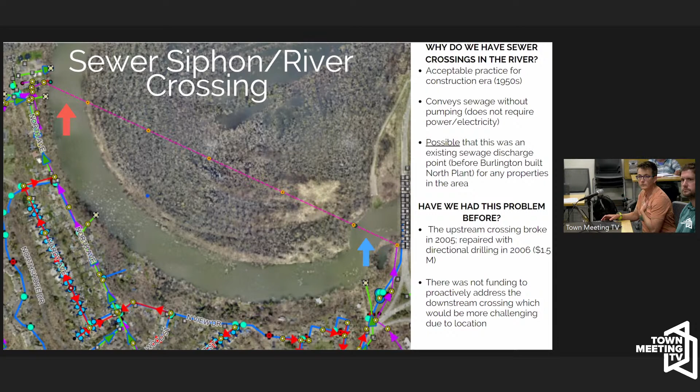But fast forwarding to the post intense rain floods, it did in fact break. This is the approximate area of the new north end that drains to that point, about half of the flow that usually goes to the north wastewater treatment plant. We weren't celebrating, but we were thinking, wow, we escaped a big one when the rains hit in central Vermont and caused all that devastation, and somehow we didn't see any impacts here.

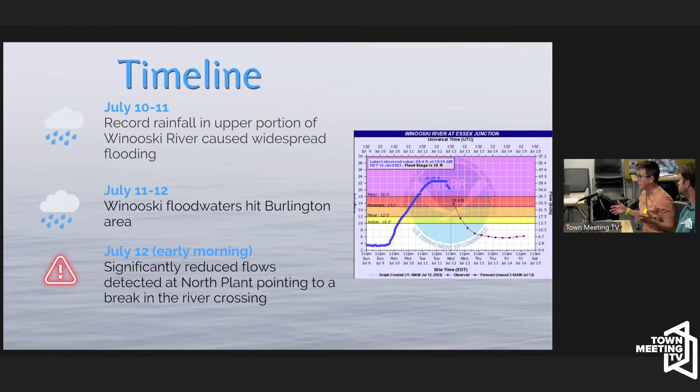Unfortunately, when the Winooski River floodwaters hit in Burlington, it was that next morning, July 12th, when I got a call from the operator saying, we got a problem, there's no flow getting to North Plant. We popped the manhole and there's no flow coming in. Fortunately or unfortunately, the wastewater operator who was there during the previous break immediately knew it was the siphon, the other siphon crossing.

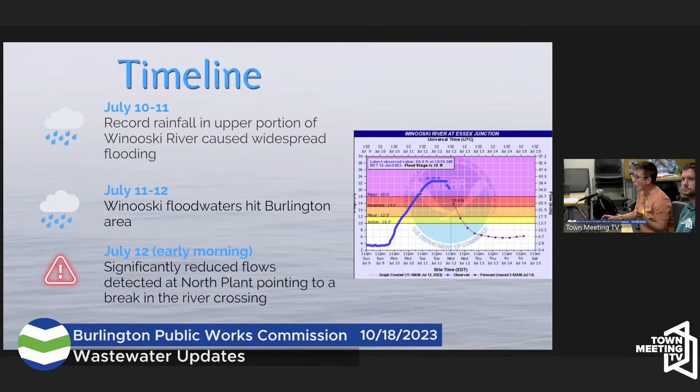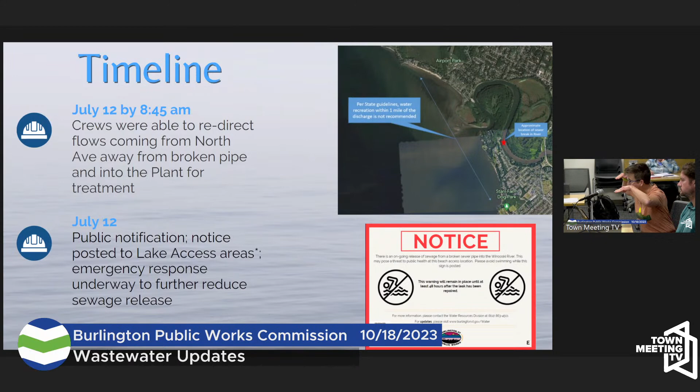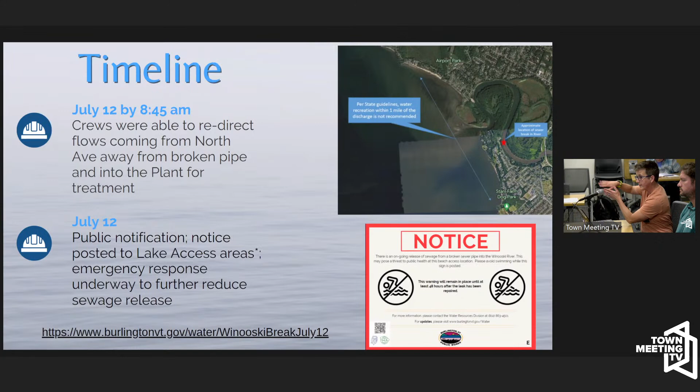So we quickly mobilized. By 8:45 that morning, we were able to redirect the flows. There's one manhole where the water from North Ave comes in, and the water from the siphon comes in, and then it goes into the plant. Because the siphon had broken, the water even from North Ave was leaking out that same break, so we were losing all of the flow from the entire new north end. Because our crews reacted quickly, they blocked off the sewer siphon part and got at least the flows from North Ave into the plant so we could treat those.

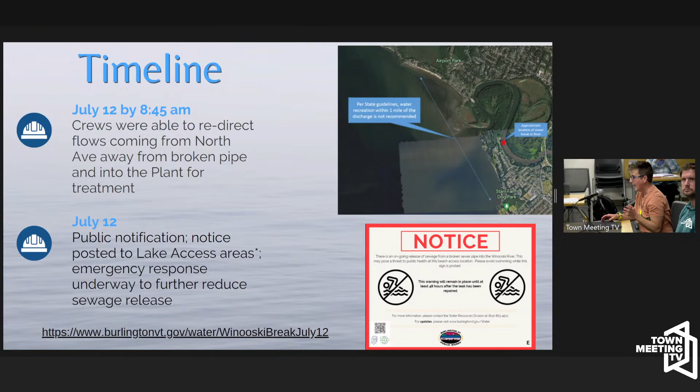Then we switched our attention to public notification, letting people know as quickly as possible that this had happened, and posting all lake access areas, including areas that aren't really public beaches but where we knew people like to frequent along the North Shore. We were managing that and then quickly shifting our efforts to a couple of different strategies.

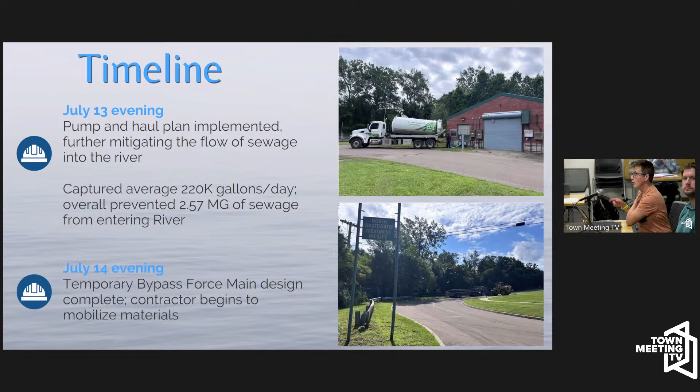The first strategy was basically 24/7 pumping and hauling, getting trucks there and sucking off as much sewage as possible to keep the entire volume from going into the lake. We weren't able to mitigate all of the stuff that was spilling in, but we were able to knock it down quickly. And then, I guess, two nights later, thanks to some amazing Iron Chef engineering...

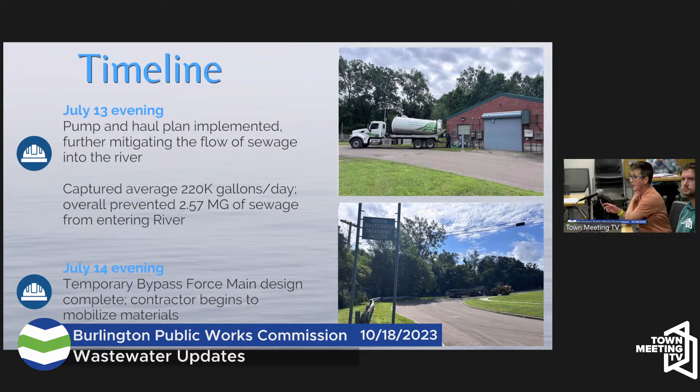Our engineer, largely Ashley Walenti, with the help of Martin and Kate, came up with an entire temporary force main and pump station design within two days. Then we were able to contact a contractor and start getting it built.

So by July 17th, and I'm just celebrating this because, no matter what happens with the rest of my career, seeing my team work this quickly to prevent additional environmental destruction was like, high five. I think I told you guys I might be prone to high-fiving and a lot of hugging in that time period, and I certainly was.

So by July 17th, we were starting to build this 5,000-foot long force main across the landscape, and by July 25th, ECI was able to put that temporary force main into operation, which was pretty darn cool. I don't think anybody here is in the New North End, but if you drive by the pipe, it's there — it makes interesting noises as the pump kicks on and off. But really a pretty cool project, a response to a terrible thing.

So by July 28th, we were able to remove the lake access alerts after we did some E. coli testing to show compliance with recreational standards. Another thing I didn't mention — when we were doing that public notification, we weren't just doing it for Burlington, we were also in communication with our partners over in Colchester, because they're very near the mouth of the Winooski. We wanted to make sure Chapin did a great job of keeping them in the loop.

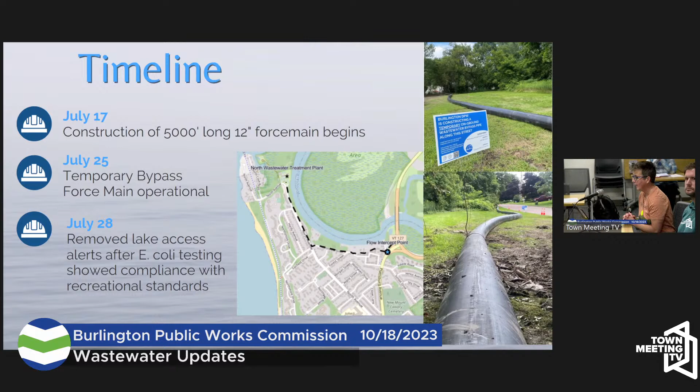When we built the pump station, we acknowledged this is a temporary situation. It's not perfect, and it's not as robust as a permanent pump station like we have in other parts of the city. We want to acknowledge there have been a variety of issues.

It's worked very well, but during large storm events, and occasionally due to a few mechanical issues, such as a day when the discharge hose cracked and spewed things into the air, in every case, because of the alarming, we were able to get on it and act quickly. But we have had a couple of additional releases over the course of this event. Overall, if we didn't have this in place, we would have been dumping on the order of 350,000 gallons of sewage into the river every single day without the quick action of the team and the contractor.

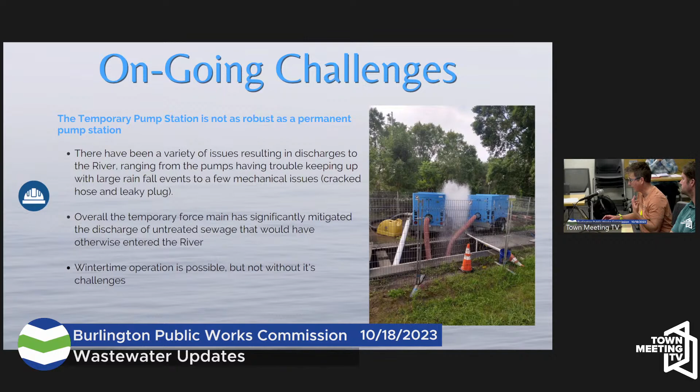All along, once we put this in place, we designed it so that if we had to go through the wintertime, we could, but none of us wanted to, largely because of the amount of effort it takes to babysit it and make sure all the things that could go wrong with it don't go wrong. So we quickly were shifting to how we could get something in place for this winter, and also the long term.

A couple of other things we did: in the early days, we had done some dye testing, which helped show the location of the break. You can see the green dye - we put this very fluorescent dye into the pipe and then used drones to make sure we could see it. We also dye tested from the other side, to make sure that first crossing was okay, and to give us an idea of whether this was a small localized break or whether we lost the whole pipe, because that would have been a whole different emergency repair scenario. Fortunately, the times we dye tested it, it came up in the exact same location, pretty close to the shore. It took us a long while because of all the summer rains and the high turbidity.

The Winooski was running chocolate brown for a really long time, and we finally were able to get divers in. We had them at the ready almost 2 weeks after the event happened, but they just couldn't get in and see anything. Even when they got into the water on August 17th, they were largely going by feel. They couldn't see a ton, but based on what they felt and recounted - I think this is Steve Roy's drawing - we were able to sketch out what we thought we were up against, which was largely just one separation, but with some scouring that was leaving that pipe unsupported along the riverbank.

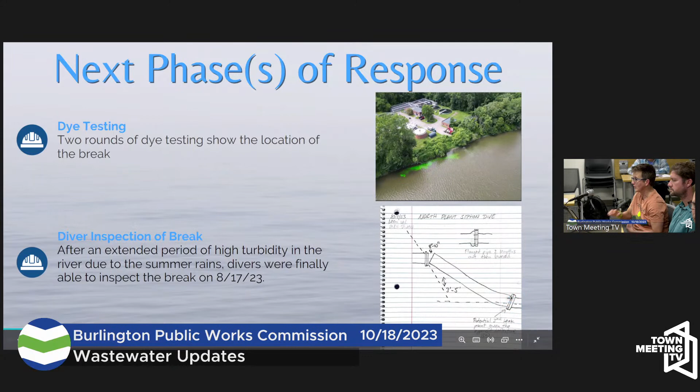This is a recent picture with the divers having gone in and really visualized that gap. The scope of work includes not only fixing that gap, but replacing a couple sticks of pipe - they're going to go about 70 feet beyond that to replace, and then do additional dye testing once it's done to confirm that it's sealed up, to make sure those joints are secure, since the pipes are joined together and it's not just one long section. So they're going to do their due diligence while they're in there.

Once this fix is in place, our plan is to decommission the pump station, those temporary pumps that are over on Plattsburg Ave.

Our plan is to leave that 5,000-foot long force main in place, so that if something were to happen to our repair—and we believe this repair should be robust—we would be able to quickly mobilize and not have to go through the whole process again and spend all that money. But we would be looking to decommission that pipe as soon as we can. That factors into this longer term repair.

So in parallel with releasing the RFP on the design build, our team was releasing requests for qualifications for design teams who could help us evaluate alternatives to not having a pipe on the bottom of the river. That might look like directionally drilling multiple pipes so we have resiliency under that section. But it may also involve creating a permanent pump station with a permanent buried force main, which might be the safest overall—just get it out of the river entirely. We don't know. We're going to have this design team help us crunch those numbers and figure that out.

And the cool part—well, two cool parts. It's not cool that Vermont reached this threshold, but because Vermont had so much damage, we went from the 75-25% cost share of FEMA to 90-10%, which I definitely gave a little yip in my car when I heard that. And then the state, because of our disaster planning efforts at the city, will cover half of that 10% local match. So we're still going to be out some money, but a lot less than we would have been.

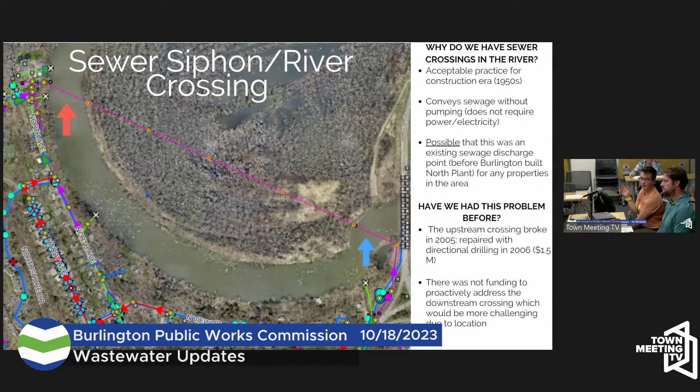I think, just for being honest, the next big challenge, perhaps not in this iteration because it can't be addressed, is that North Plant is not an ideal location on the bend of a river, kind of in the cutoff chute if you look at the river on a bigger level. In fact it's the one piece of city infrastructure that does not have insurance because of its location. So just sharing the risks we uncover every day of how things were built, and trying to figure out how to do our best with some of the things we're going to be talking about. Certainly, the design for the next upgrade will keep that in mind to try to make it as resilient as possible given its location. But next generation, wherever you are, they're gonna have to figure out how to deal with the location in a bigger way. Sorry, we had a lot of rah-rah, but we gotta bring it back to reality.

Has insurance, no. Flood insurance, no flood insurance, sorry, just to be clear. For the record, it has insurance. Great, thank you for those responses.

All right, and now onto the tertiary treatment pilot. Yes, tertiary treatment. So why, given all the things we have to do, would we even be looking at new things at the wastewater treatment plant? The reason really is the health of our lake.

There's a lot of things that factor into cyanobacteria blooms. Some of them we can control and some we can't, or not imminently. One thing we can't really control right now is the calm, warm water conditions we saw this summer, which kicked up cyanobacteria much earlier. The piece humans can control more easily and quickly is how much nutrients we're putting into the lake. Because of that, the state in 2016 passed a total maximum daily load, which looked at all the different ways humans needed to limit the discharge of phosphorus, one of the primary nutrients in the lake that drives cyanobacteria from the landscape.

And for those of you who have attended previous presentations, we looked at all the different ways in which we thought Burlington could manage its phosphorus obligation.

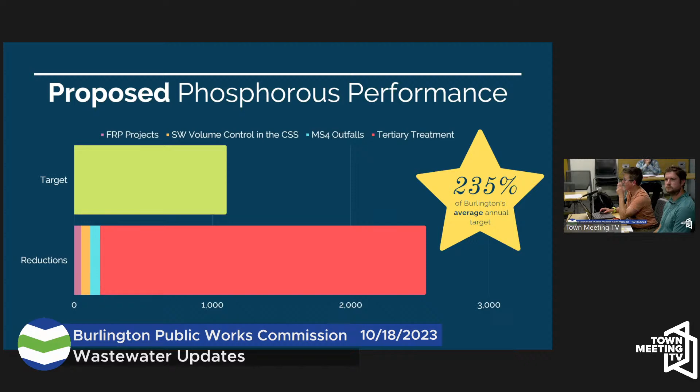So when wastewater treatment plants are looking at new technologies, it's customary to do a pilot. You don't design it on your desk and then hope it's going to work. You actually need to subject the different technologies you're interested in to the actual conditions. The goal of the tertiary pilot was to evaluate the ability of selected technologies to meet 0.1 milligrams of phosphorus.

The average performance of main plant is usually able to get the phosphorus level down to about 0.28 milligrams per liter. We've had it evaluated, and engineers say the plant is performing exceedingly well, largely due to the creative ingenuity of our plant operators who are dialed in and constantly watching how things are varying. But we can't get it any lower than that, even with additional chemical optimization—it's basically doing as well as it can.

So in order to get down to this 0.1, which was modeled in the integrated plan, we need additional technologies. We needed to evaluate this under a variety of conditions, what we call steady state, which is just when everything's normal, a typical day, nothing crazy.

Hydraulic stress, which is when the plant receives a lot of excess flow from wet weather, from a storm event—our plant flows ramp up from like 3.5, 4 MGD up to as much as 13 MGD very quickly, and that can present a stress for any type of treatment technology.

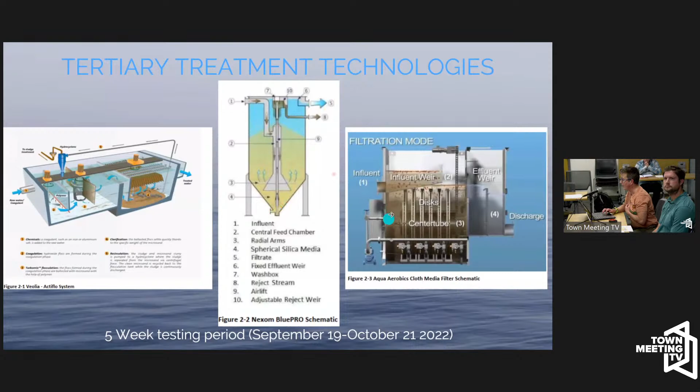These are all the fancy schematics: this is the Actiflo system, the Nexom BluePRO, and then the Aqua Aerobics cloth media filter schematic.

At the end of the day, all 3 technologies met the goal of 0.1, so there was no one technology that was a super dud. But when we looked at Aqua Aerobics, it performed the best overall during the steady state.

So Aqua Aerobics is this green line, this red line is the goal, and the purplish blue is the influent TP, the phosphorus that's coming in before it goes through tertiary treatment.

You can see that the orange, Nexom, and the regular blue, Veolia, kind of hugged and were able on average to stick around that 0.1 during steady state, except for the first day when they were dialing things in. The cloth media filters really were able to perform super well throughout that entire period.

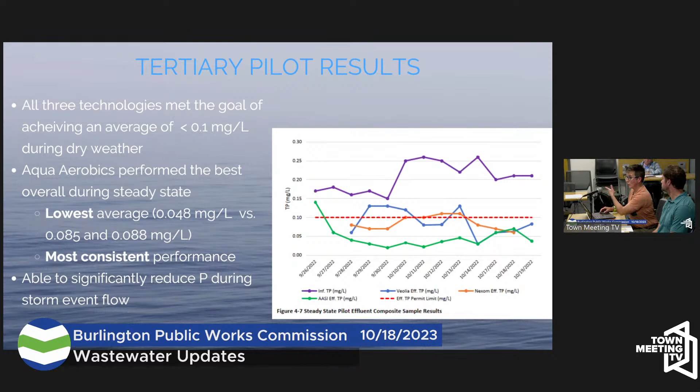It also didn't do as well—I can't remember if it was the Actiflo—it didn't do as well during the storm event, but it still did well. It still was able to knock down the phosphorus that we usually would see going out into the lake during a storm event, down lower, I think to 0.38 or something like that.

This is their performance over all of the different states: steady state, the hydraulic stress, and then back to steady state with that one peak being the vortex blend. This isn't a comparison, this is just the Aqua Aerobics, but you can see it was able to stay below that 0.1 target the entire time, with the exception of that one storm event. But even during the storm event, it's knocking it down quite substantially, so it is able to do good things during a storm event.

Any questions about all the graphs? I love graphs. What was that hydraulic stress period—was that heavy rain during those few days?

So the hydraulic stress period is an artificial hydraulic stress situation that they create. They're only pumping a certain amount, if I recall, to the tertiary treatment, and so they artificially pumped more than would usually go there under normal conditions. So that's artificially generated.

The vortex one was them actually grabbing flow from the vortex and blending it, then putting it through the system so that it was seeing that potentially dirtier water. Because the vortex—the big swirl separator—handles water that's not going through the full primary, biological, and secondary process, so during certain portions of the storm it can have more phosphorus than treated wastewater would, though certainly not more than regular untreated wastewater.

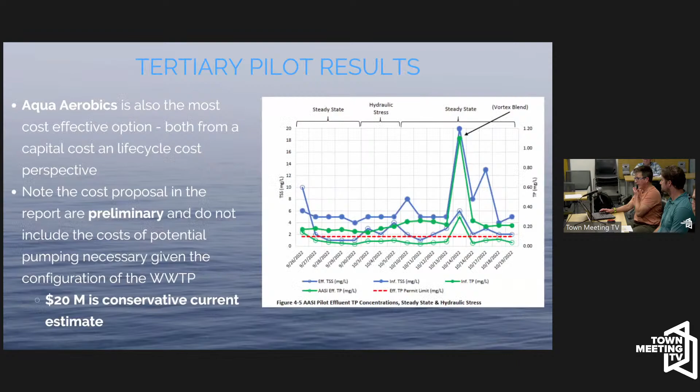I would be remiss, I've frequently committed, Burlington is gonna do its part, we're gonna meet our phosphorus obligation through the TMDL. The challenge is the lake is a mixed system, so continuously remind people to support statewide efforts for phosphorus reduction, because we can do everything that we're gonna do, and there's still gonna be phosphorus coming down the Winooski River, and so sadly, we may very likely continue to see cyanobacteria blooms.

So we're having conversations with Burlington Parks and Recreation, Waterfront, about resiliency measures, about how we provide places for people to cool off even if they can't access the lake. One of the challenges with the flood, I had heard that the entirety of what came down the Winooski River in 2022 as far as phosphorus came down in that one flood event. So climate change is a thing that we collectively as a state and a region have to really try to figure out how we're gonna change.

Again, sorry to have sadness, but so much nerdery and happiness, but.

Okay, well, let's see if we have any questions so we can end on a high note now. Commissioner Fox, any questions on the presentation? Yeah, I had one, I apologize. It was a lot to get through, but let's see what page of the packet that I'm on. Oh, the report itself? Okay.

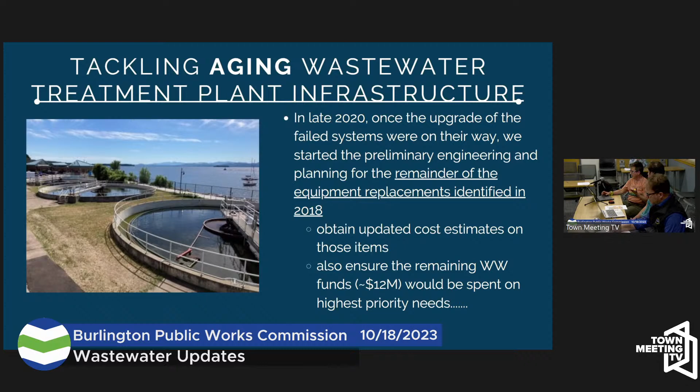I've shared this with you all before, but what we found when we started looking at it from a risk perspective is that while we were doing some improvements after the 2021 upgrades and getting rid of some of the failed systems, as you looked out across time, even after we thought we could spend the $12 million, there were still a ton of systems that were in the C, D, and F category - and this is also an eye test, apparently. For those of you who can't see that, those are letter grades A, B, C, D, and F, using a fairly rudimentary risk system. Overall, the number of systems and the replacement costs of the remaining high-risk systems we found were significantly higher, significantly greater than the remaining money that we had.

And we also started to see, as we tried to move all the pieces, that anything less than a truly comprehensive equipment and process renewal was going to keep Burlington at risk of wastewater treatment failures and what I consider preventable beach closures. Some beach closures are harder to prevent because of climate change, but the ones that directly result from our failed infrastructure, I view as preventable.

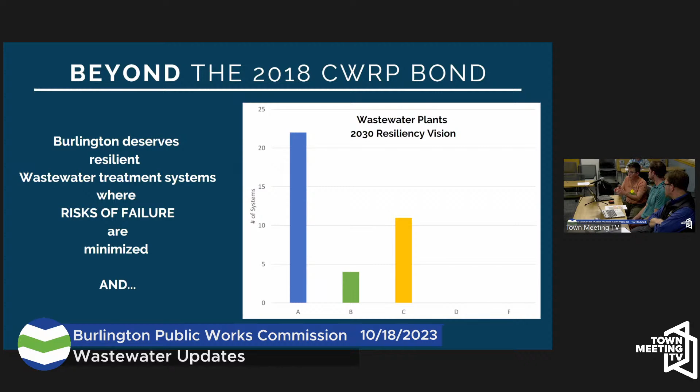I made my pitch to you all last time that Burlingtonians deserve resilient treatment systems where risks of failures are minimized. So at its core, we need to make sure that the stuff we have right now works, because we're starting to have trouble with that.

Separately, when we think about a more modern wastewater treatment system, we want to focus on actually improving and modernizing those systems, not backsliding, but doing things like tertiary treatment to create even better water quality for what's going out the pipe. We're making sure our systems are as resilient as possible against flooding and other natural disasters, and looking at how we increase the capacity of Main to accept a potential East Plant consolidation, as well as other growth opportunities in the city.

We have a number of safety issues, and we want to make sure this upgrade makes conditions a lot safer for our employees, particularly around ventilation, since they're exposed to a lot of different gases from sewer systems. The last piece, which I think everybody will vote yes for, is we may not be able to get rid of all the odors, but through work targeted on the primary systems - the initial tanks, which have some of the stinkiest water - we're hopeful to reduce off-site odors at Main Wastewater Treatment Plant, which we hope will benefit bike path users.

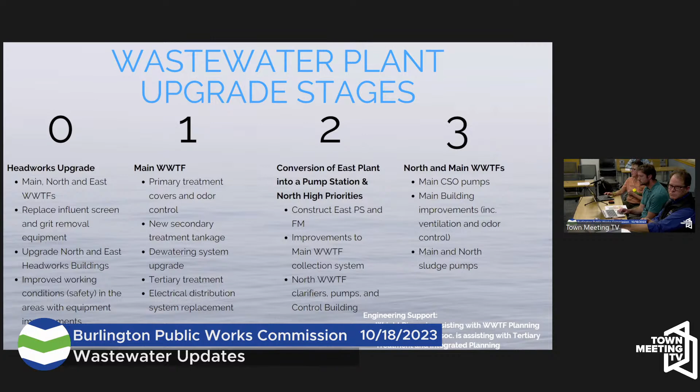This is what I alluded to before. I'm going to hand it over to Martin. Stage 0 is largely us drawing down the remaining money that we have. As we move to Stage 1, there's a specific focus there, and that's where tertiary treatment would be. Stage 2 has a different area of focus, and Stage 3 is further out. We want to make sure we have this big plan for how we're going to progress over the coming years. With that, I'll hand it to Martin.

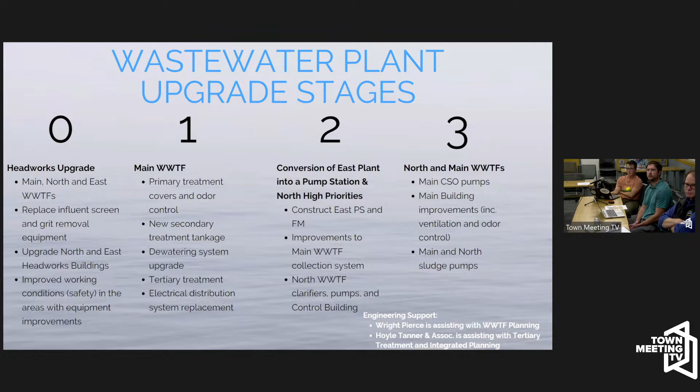As we move into discussion of Stage 0, I wanted to talk about schedule and cost a little bit. This is the headworks upgrade, which includes screening and grit primarily at all three wastewater plants. Design is underway, so from 2023 to 2024 we'll be in design, with construction planned to start in 2024 through 2026. The cost estimate is approximately $12.8 million, which is part of the 2018 bond.

As Martin goes through, we are presenting our cost estimates - they are conservative. We're constantly refining them, and early in the preliminary stages you often see cost estimates with higher contingencies, but they are what they are.

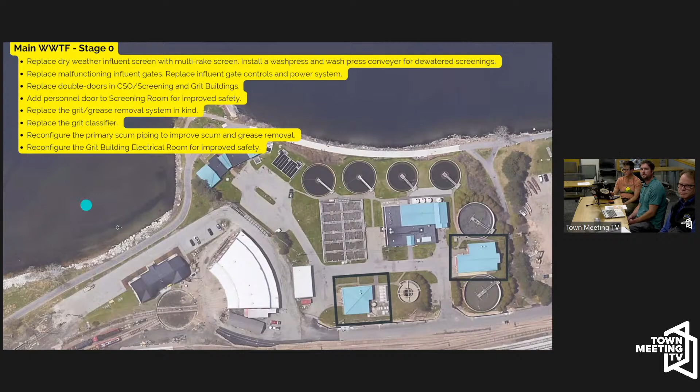So this is Stage 0 in final design. Megan is highlighting the bottom, which is the screenings building, where the wastewater first enters - that's where we'll be replacing the dry weather influent screen with a rake system and a wash press. It's basically a replacement of what's there with modern equipment, as well as influent gates and the controls for those gates - pretty substantial pieces of equipment that just need to be replaced because they're constantly failing. I have some photos of those.

We have some building improvements here that are necessary from a code perspective, as well as the new equipment we're putting in. On the right-hand side of the screen, that's the grit building - we'll be replacing the grit and grease removal system and updating components of that system. Again, it's largely a replacement in kind, but with modern equipment meeting modern design standards, because these systems are at the beginning of the plant process, so they really do experience the highest wear and tear - bricks, rocks, whatever anybody puts down the toilet or in the catch basin, so they get hit hard.

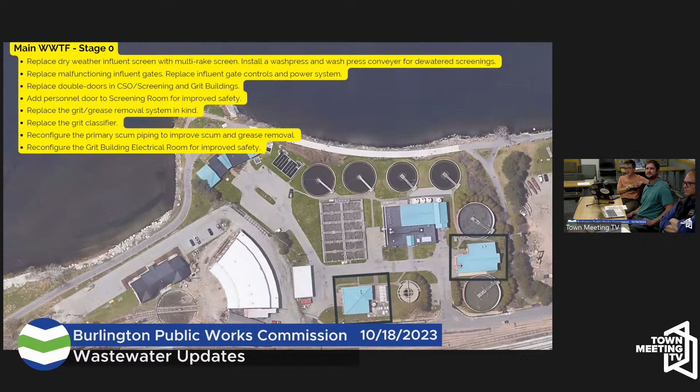Probably go to the next slide.

Same thing is happening with the proposed final design for Stage 0 work at the North and East wastewater treatment facilities. The east plant is the aerial image on the left, and the highlight is around the grit and screening building. The building itself, with the green roof, is where the current screen is that needs to be replaced.

On the exterior, right on the right-hand side, is the grit and grease removal system. As part of this, we'll also be modernizing the building so that it's more energy efficient and has up-to-date HVAC ventilation.

And that system, even though we're going to consolidate or turn East Plant into a pump station, is something you would need to have there anyway, so it's not like we're spending money and then undoing it later. We picked items that were high priority and that under all circumstances we perceive need to happen. We're not wasting money on things that in five years we may not need anymore. We're going to need these for a long time.

And the same applies for North Plant, down at the end of North Ave. Basically it's the same design, constructed at around the same time.

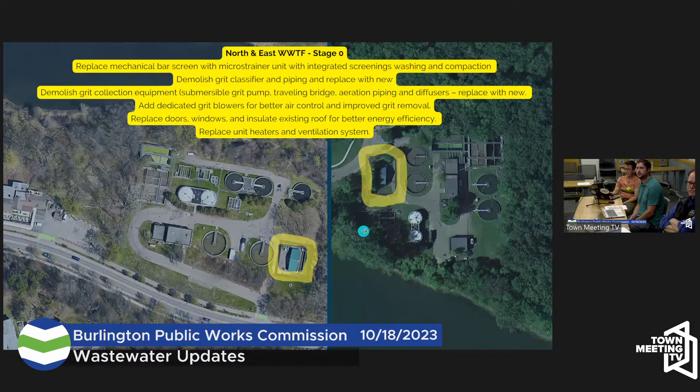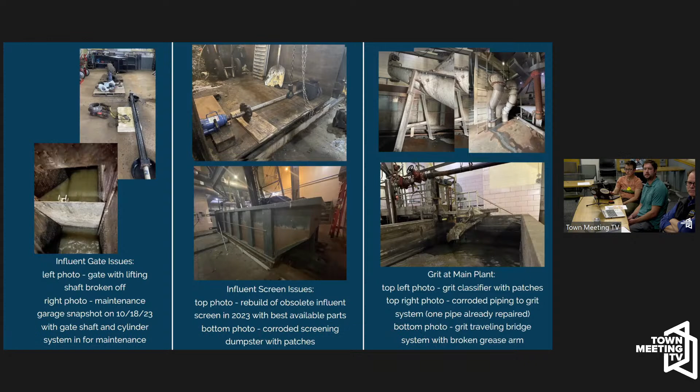Next slide, these are some photos that, thanks to operations staff, I collected. Some of them even from today, because I was curious what's in the maintenance garage, and it happened to be one of the cylinders and shafts for a gate.

On the upper part, that's something that will be replaced. Multiple components of our gate systems are failing and are going to be replaced for Stage 0 work in the screenings building. On the bottom is the channel where the screens are, which is supposed to have the shaft connected - it just happened to snap off after that specific failure.

And the thing is, if these don't work, stuff gets through and will just destroy the rest of the plant. So it's not really something we can leave.

And then in the middle here, this is in the screening building as well. I think it was early 2023, or end of 2022, one of our mechanics completely rebuilt our influent screen that we're going to be replacing. But they had to use custom parts because the equipment is completely obsolete - the manufacturer doesn't supply the stuff that we need. Thanks to having such a great operations team, we were able to do that.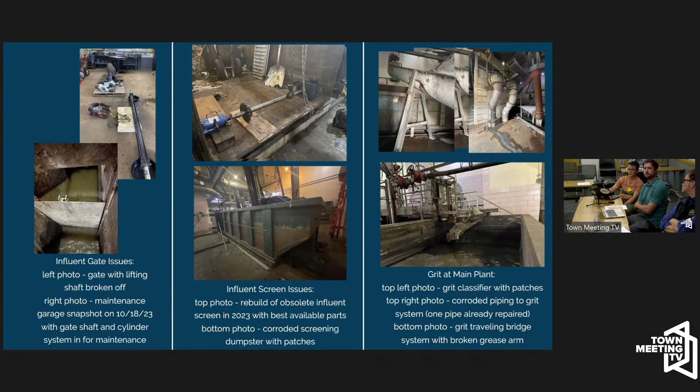And the bottom photo is the grease arm on our grit collection system broken, so that's before they repaired it. Our guys are always working and maintaining the facilities, and I wanted to show that.

It'll relieve a lot of headaches that are only going to get worse if we don't fix this. And also, the person who primarily fixed all of these things is probably retiring in the next year. Just from a workforce standpoint, finding folks with some of the skills that we currently have has been hard as well, so that's also a risk in the back of our head.

So Stage One work - we're in the preliminary engineering phase right now, from 2023 to 2024. Design will start in 2024 through 2025, and then construction starting in 2025. This is a big ticket cost item because it's not just replacing in kind - it includes significant improvements at the main wastewater plant, including tertiary treatment and new tankage. So I'll move to the next slide and jump into that.

Thank you, sorry we're going too slow. Yeah, no, I know, it's my age. Dollar signs, dollar signs, dollar signs.

Yes, 121 million estimate was what's on there for Stage One. And it's a significant update to the main plant.

This is in preparation. We can't bring East Plant to Main Plant without upgrading here first, and upgrades here are also necessary for aging infrastructure. I can get more into the justification of the East Plant pump station when we get to that slide later, but I just wanted to set up that this upgrade is to accommodate the East Plant flows coming here.

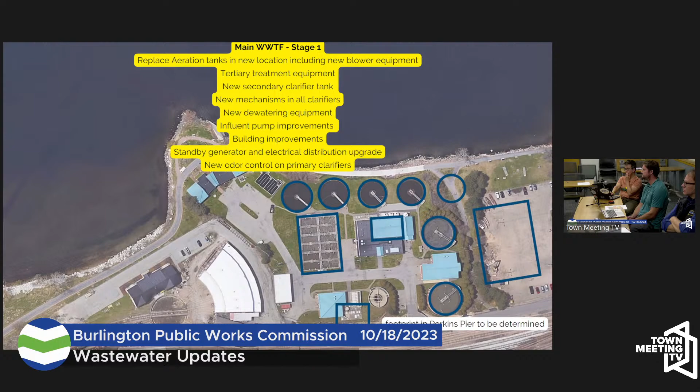I don't mean to be dense here, but basically if you're saying East Plant has a capacity of, say, 5, and Main Plant has a capacity of 5, by combining them you have a state permit capacity of 10, without having to ask for more for Main Plant. Is that my understanding? Correct, yes.

Sorry, yes, yeah. So okay, it's closer to like 5 and 2, and like 1.8... 1.2, is it 1.2? But whatever it is, you're adding the two of them, and that whole piece for Main Plant then is still under the same permit.

Right, okay. East Plant gets, I think, approximately half of its permit, so that means we get that additional capacity at Main Plant, which is then projected to meet future growth for the next 20 years at Main Plant. Okay, much bigger sewer shed. Thank you.

Also, and we'll probably get into it or touch upon it again, but this enables us to consolidate resources, and when we look out long-term, it ends up saving ratepayers money to not have three separate plants. It's sort of weird to have a small town with three separate wastewater plants, and a lot of engineers, when they come here, say they just put plants where the discharges were already happening, so we'll talk about that more, but there are lots of reasons.

That was already one of my questions, like why are we doing this? Yeah, that's great. Is there anything else?

So the first three items, the new aeration tanks, tertiary treatment, and secondary clarifier tanks, those are all new added capacity, and then I'll get into the other items.

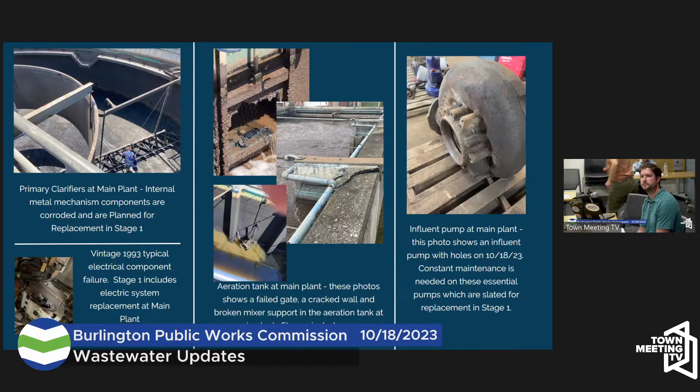You can see here that one of the gate slides in the upper left-hand corner is completely rotted out. There's a big structural crack in that tank right there, which makes me nervous when I drive by — yeah, those are the biggest ones. The lower left also shows a structural arm support that broke off of a mixer in the aeration tank. And then our influent pumps are how we get the wastewater through the treatment plant, and those need constant maintenance. This one was in the shop today, so I took a photo — it has some holes through the body of it, so just wanted to share that.

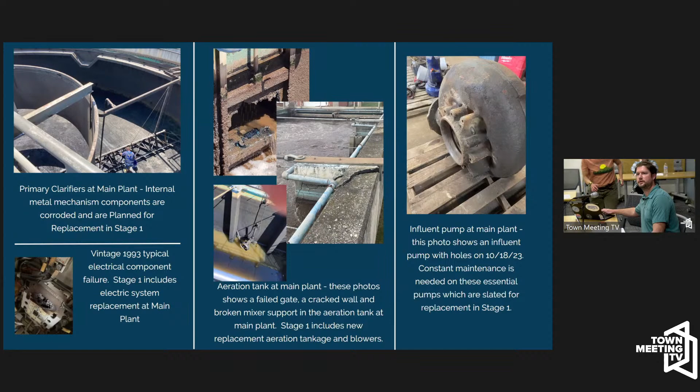What did you have, another?

So, this is stage 2. Now that stage 1 is done, we'd be able to accommodate the flows from the east plant. This is the pump station conversion, as well as important north wastewater treatment facility improvements. This is also in the preliminary engineering phase from 2023 to 2024. Design would be a little bit after stage 1, with 2025 to 2026 as the target. Construction in 2026 to 2028, with the current cost estimate at $38 million.

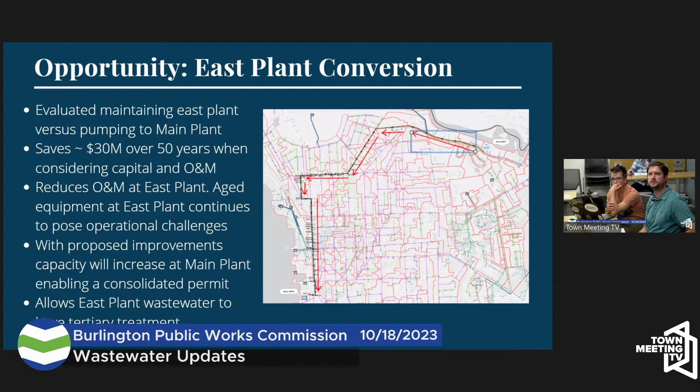So we did talk a little bit about this, so I'll go through the pieces we haven't covered yet for the east plant conversion. As you know, east plant is on Riverside Ave in the upper right-hand corner of that map, and those arrows show the approximate route that new piping would be needed to get the flow all the way to main plant. This was evaluated, comparing keeping east plant and maintaining it as-is versus pumping it to main plant. If we keep it as it is, we'll have to upgrade it because it's so dang old.

And so with that, when you look at it over 50 years, there's a $30 million cost savings when capital and O&M are considered. So they're significant cost savings, which we will have to refine more as we move through engineering to confirm that these assumptions are correct.

It also gets rid of a pretty bad operational challenge right now, because there is so much old equipment at the east plant. So if we did keep it, we would have to do a major overhaul there, which is all considered in the evaluation.

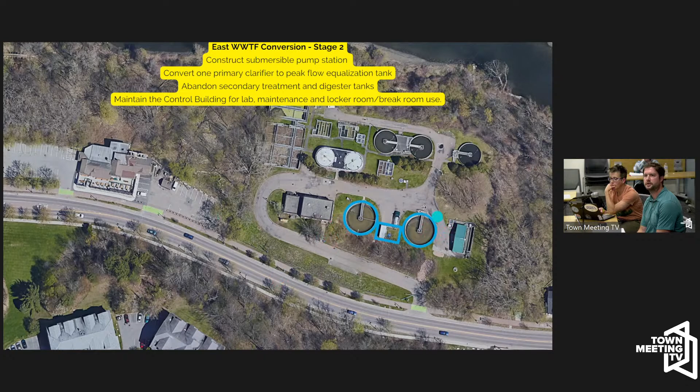So the stage 2 east plant conversion: it would be a pump station, that middle square is where we're assuming the pump station would be, and then the capacity of one of those tanks, the primary clarifier tanks, is calculated to be enough for emergency storage for large rain events as part of the pump station design. We'd also be maintaining the admin building just to the left of that.

And as Megan mentioned previously, the Headworks building on the right still benefits this project because then we'll have treated, all the grit will be out of the sewage before it's pumped.

So North Wastewater Treatment Facility kind of gets overlooked, except for the siphon I guess, but usually they're not a big problem. But they do have some significant improvements that are needed.

Clarifier mechanisms, similar to main plant, all need to be replaced. And the intermediate pumps -- basically North Plant's pumping system is not at the very beginning of their process, it's halfway through. That's basically how the sewage gets through the end of their treatment process, and that needs a significant upgrade.

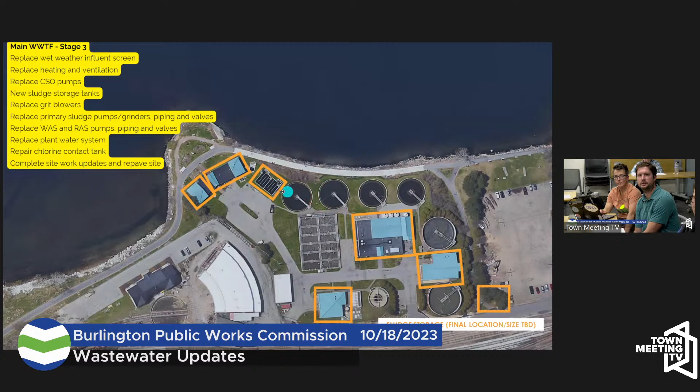And we will be repairing the chlorine contact tank and other site improvements.

Similar to stage 3 at the main plant, here at North Plant we will be doing replacement of the return activated sludge and waste activated sludge pumps, piping, and valves.

This one's different. We have waited until stage 3 for the aeration system and blowers, which aren't necessarily in great condition, but we feel they can go a little longer. That's a really critical component of treatment, so I wanted to point that out.

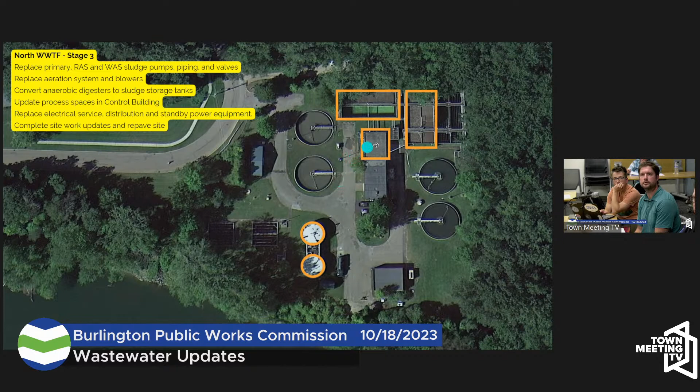And then converting the anaerobic digesters to sludge storage, that's where Megan's pointing now. Updating the control building, replacing electrical, and site updates.

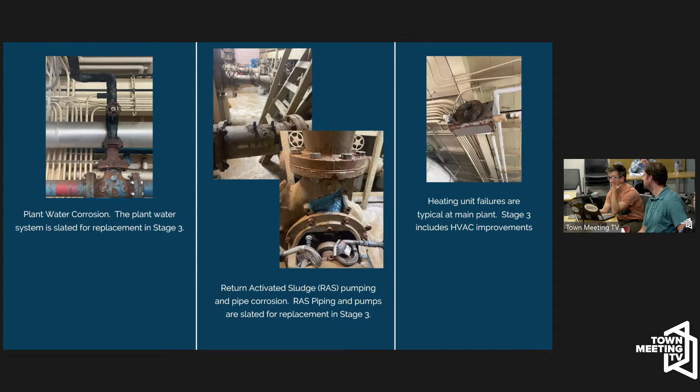Just some quick photos of corrosion. I don't need to talk about every item, but just corroded piping inside the main plant building. This is what we're waiting for stage 3, even though it needs to be done soon. Basically, going all the way through stage 3 gets us to full plant renewal, setting the stage so we won't have to deal with it within our careers—maybe someone else's within the next 20 years.

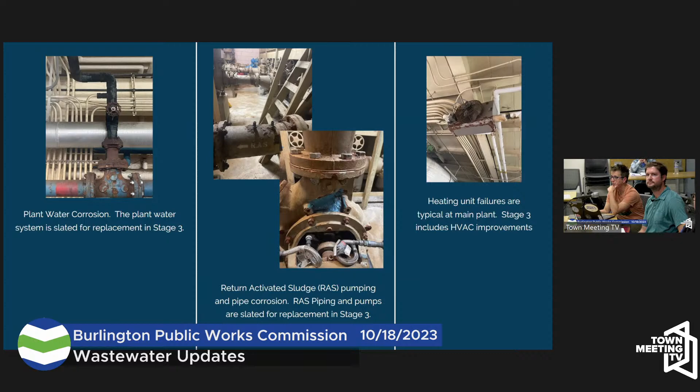It's meeting the 2030 resiliency vision of trying to get that all done and making sure Burlington has fully working, modernized plants by 2030.

Martin's leading the charge on the wastewater treatment facilities. There's plenty of other things we're continuing to plan, all listed here, whether it's additional pump stations, collection system improvements. We've got stormwater outfalls that still need to be repaired and combined sewer overflow mitigation.

On the drinking water side, the 1867 pump house is responsible for pumping water from the system, from the reservoir up to the tanks, which feeds the hospital, the region's only level 1 trauma center. It's very old, 1867, and needs to be replaced. That's completed preliminary engineering and is about to go into final design. So that's on the ticket that needs to go forward sooner rather than later.

I can't remember off the top of my head what the current cost estimate of that is, though. I'd have to check. Yeah.

And then, as we've shared before, the water distribution system—the valves, the transmission mains, and just all the regular piping—continues to need us to chip away at it to prevent additional water main breaks.

Is there anything else not on this list that we're doing? Well, those are the big ones. Well, there's also the drinking water plant, the treatment of the drinking water plant, that was last updated in 1984. It doesn't have as many of the issues because it's not as exposed to harsh environments like wastewater is, but needs to be looked at and is being looked at.

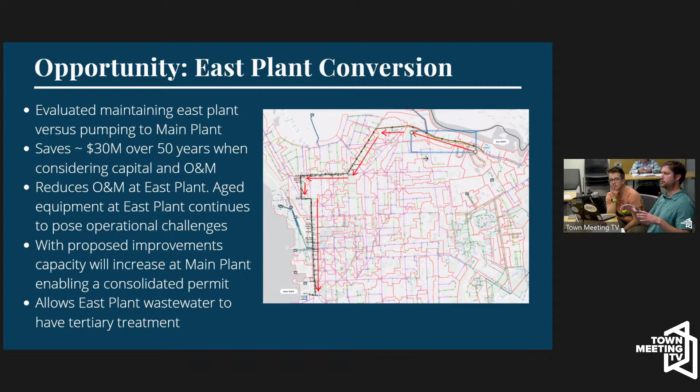We need to go back to this slide. It would be a significantly sized pump station, with design parameters similar to many of our other pump stations in the collection system—just the biggest one. It needs storage based on power outages or torrential rain, which is what the clarifier tanks would help with, retaining the storm flows. Then it would all pump along those red arrows as the approximate path, so it would be a significant right-of-way construction project, getting a new pipe all the way from East Plant to the main plant.

Some of the questions are, in earlier iterations we were trying to just build a force main from Riverside's location, sort of near Bluebird Barbecue, and get it pumped up to the gravity system where it could then go via gravity. I think we're also evaluating whether it may be better to have its own dedicated force main for more of the path than we originally thought.

I think it's the bottleneck—our main plant is a CSO facility, so as you get there, that's where all the storm flow is going. If we're adding East Plant flow, it adds a lot of complexity and issues, frankly. So if we have a pipe that goes all the way there, we get around that—we're not impacting the capacity of the piping that already has issues in that area. One potential benefit is, if we added it to the collection system, it would go through the screening. We've already screened it before it gets pumped, so if we pump it directly to main plant, we can put it in after the screening equipment.